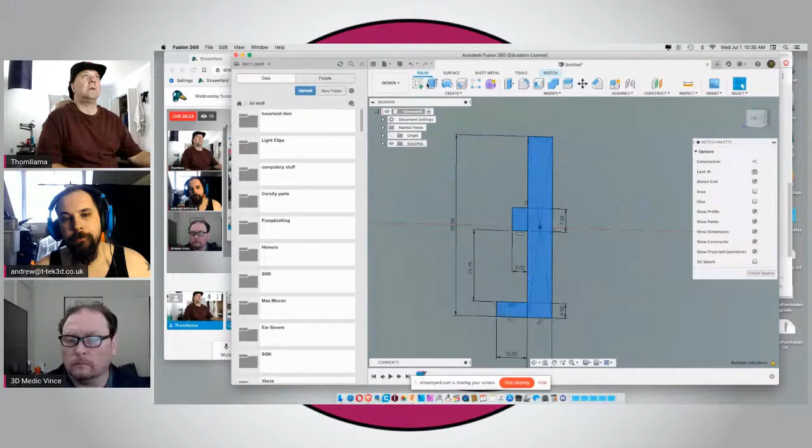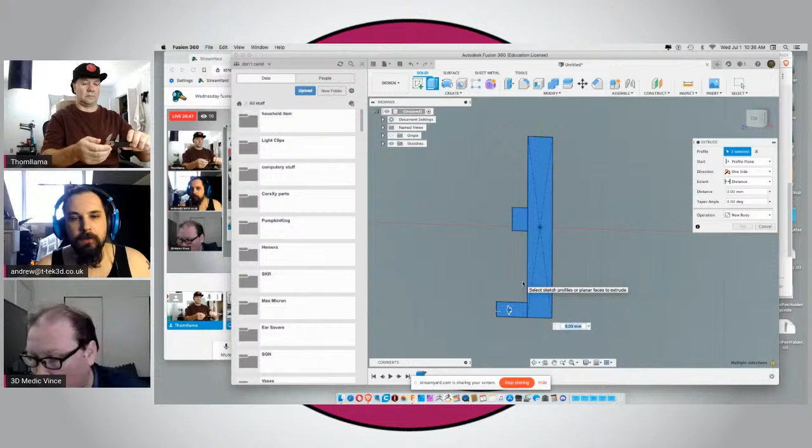I need to go back. Let's do it. I'm designing a new prop for Tanner's rubber band engine, because I found the other prop works, but it doesn't have enough push to it. So, 20? Is 20 enough? Might go 25, even 30. I might go 30, make sure it's beefy enough. 30.

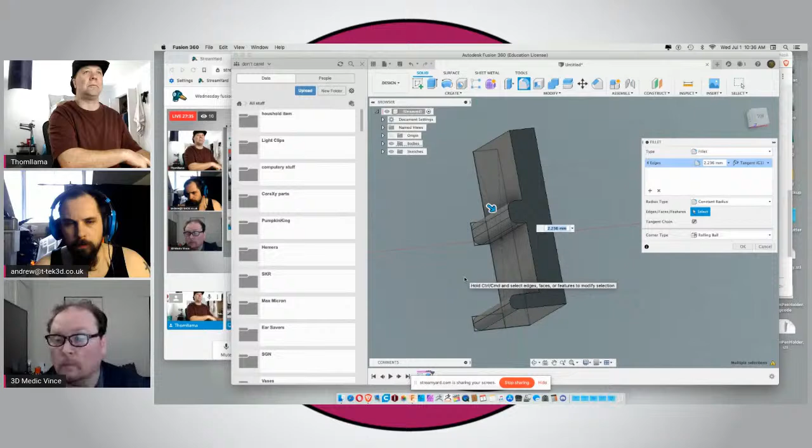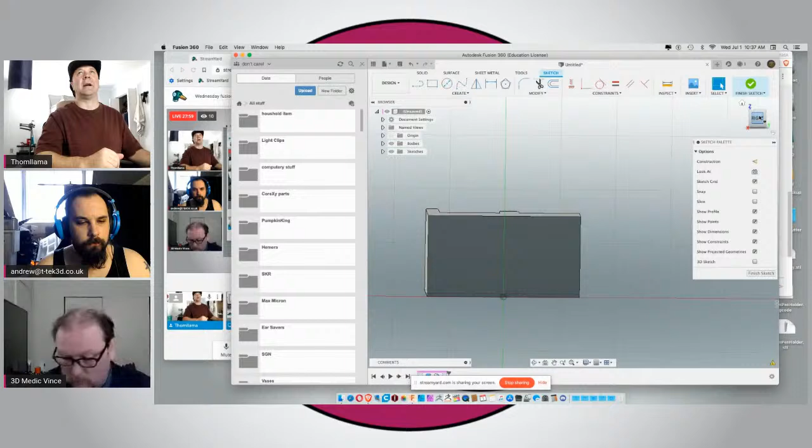Okay. And then the actual brackety thing here, which I hate it when it does that. Why did you rotate like that when I had you all rotated where I wanted you? I hate when it does that. It's so annoying, like it just does it for no apparent reason.

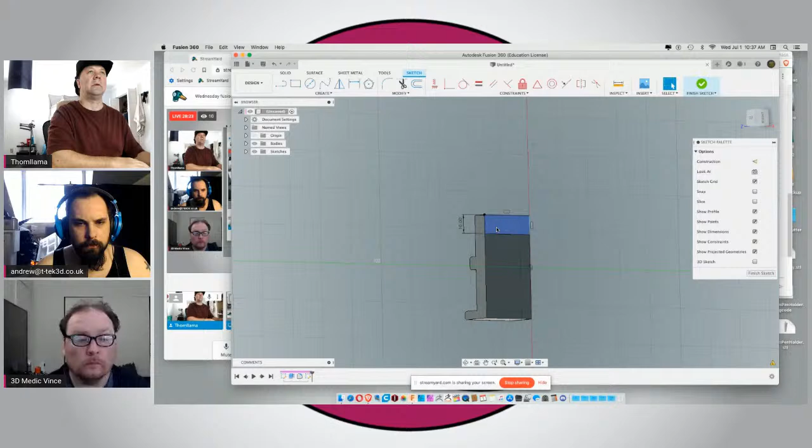And the tab, let's go 10 there and make it kind of big and blocky, even though it doesn't really need to be. Let's extrude that out. There's an easier way I could have done this, I could have done it with the rest of it. Let's come out like 10 or 12. 12 sounds good.

And then let's put a hole in it for a screw, and it's going to be capped. I wish you could set these defaults, I've yet to figure out how, because I use the same ones all the time. So I wish it would let me just default them, but I have yet to figure out how. I'm pretty sure there is a way.

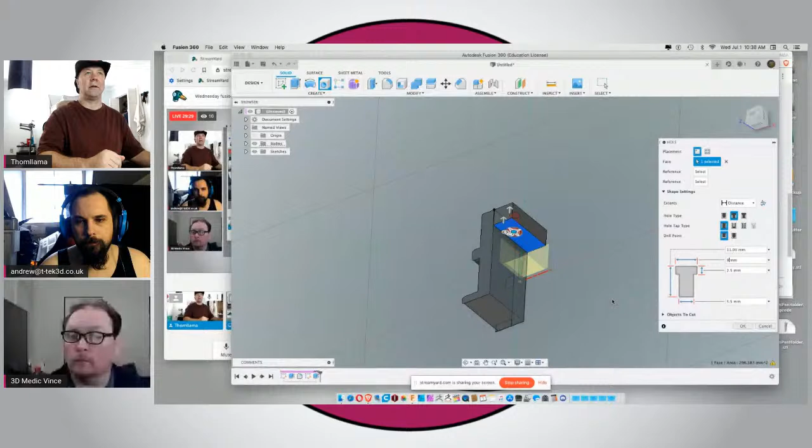2.5. And I want this at 5.5 because that's what most basic everyday screws are, and the head is usually around 9. What the hell is it? I want, what did I do? 30. So I want 15 off of that.

I think that was 12, so it needs to be 6 off of that. That locks it in place. And then when I print this thing, the hole will stay there.

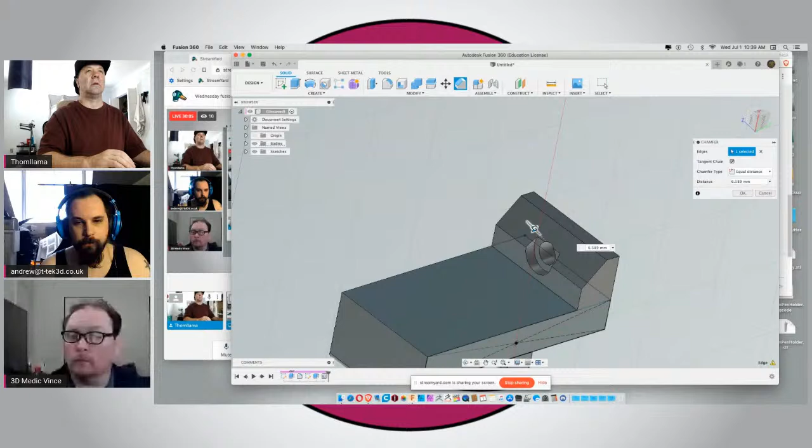Yeah, I made a small stack of those ear savers to take to therapy to give to the workers there. They seemed appreciative about it.

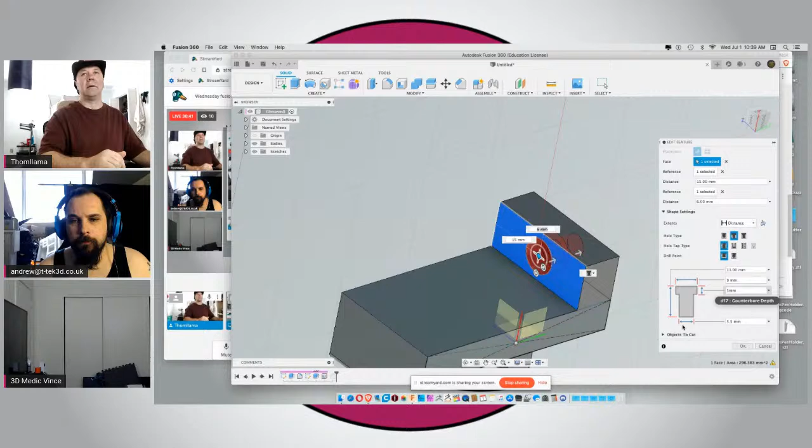2 distances. Bring that into there. I guess I got to do my recess even deeper because I want that to be proper like. So go back to here, edit feature, I want this right here to be deeper. Let's see, that whole thing is 10 or 15 deep or something, so if I do like 5, that will give me plenty. That'll basically work, that'll work.

Not what I wanted, cancel. I want to edit this. Edit, I want this to go all the way down. I think I did 12, right? So 12 should work.

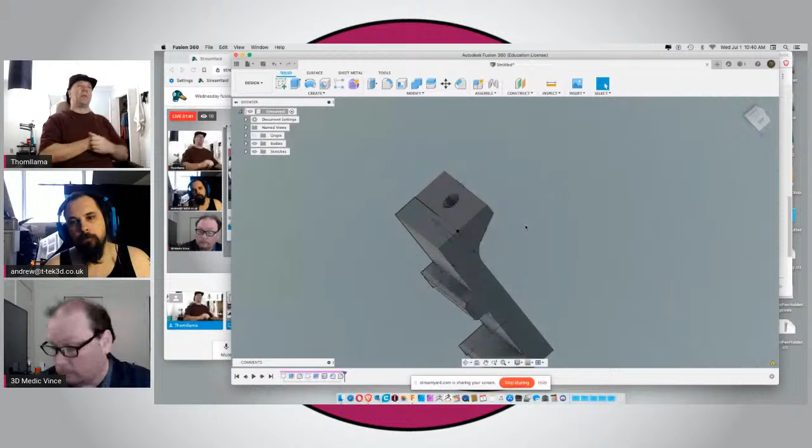And then I can actually round it to make it ultra cool. Bring back around that way, so it's a much stronger joint. Right? I'm not hating it. So if I just go with that, I need 4 of them. But actually I only need 2, because 2 more of them I have to put the stop on the back of.

So it can't just slide right off the back of the thing.

And this hair towel just won't stay up there, so I'm not going to bother with it. Don't really need it anyways.

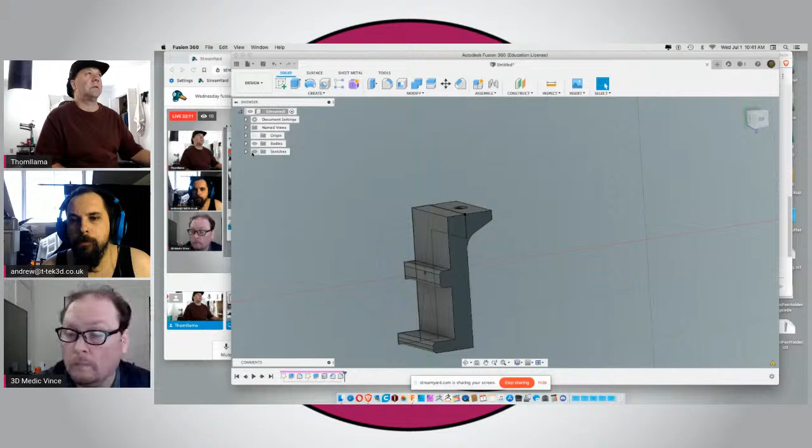Right. No way. I think I'm okay with that, that should work just peachy.

I cannot see a problem with it. Let's get that little round over, even if it's a little one. Let's do like 4 - 4 sounds good, that's a good number.

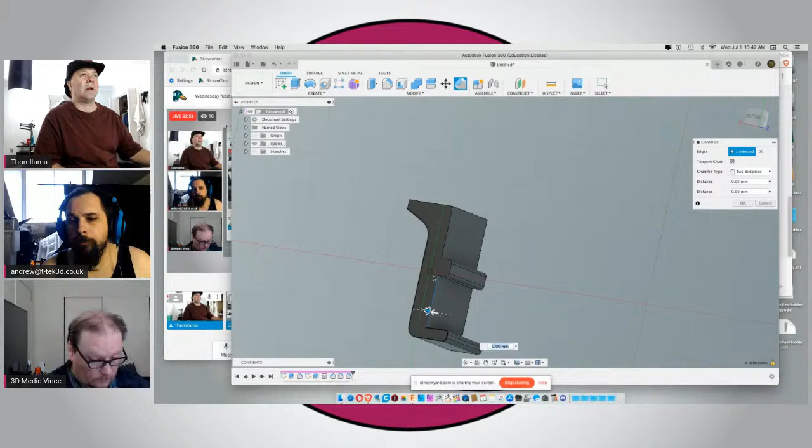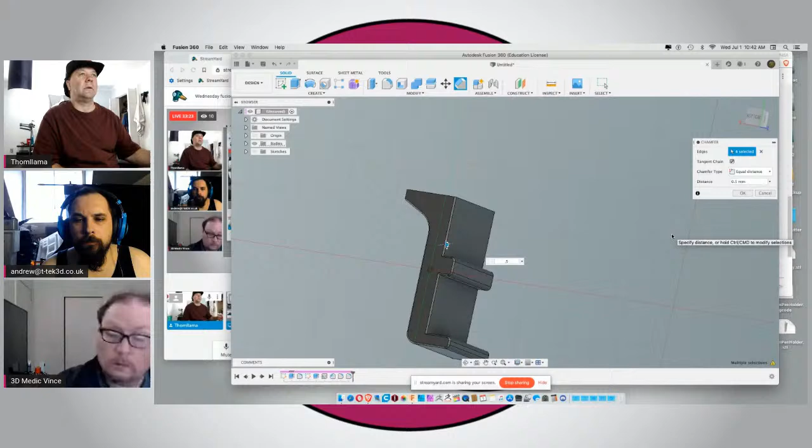Actually, I think I want to chamfer just a little bit - that edge, that edge, that edge, and that edge. Do it equidistant. Will it even let me? I don't want to do the whole thing, I just want to do those front edges. Gosh darn it. 0.5 - no, if it does the whole thing, who cares?

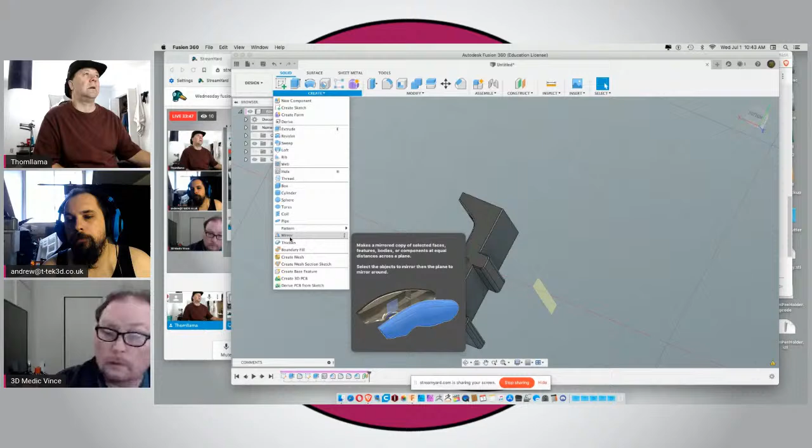Okay, and then a mirror. There's the two front ones. Let's change those. There's two back ones. Actually, all I need is one of them. I'm going to have to mirror after I modify it a little bit.

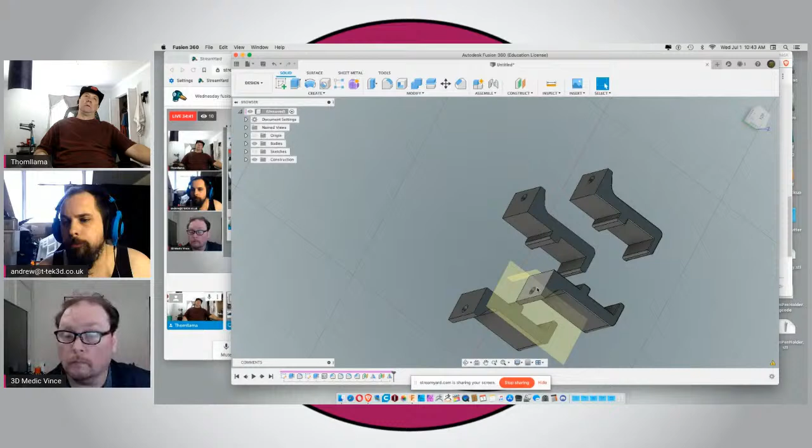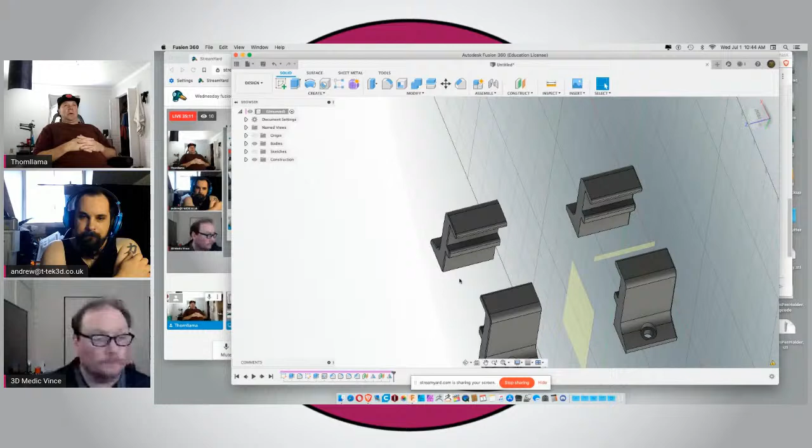Thinking on whether I should attach them or not - if I should just have two sides or if I should have 4 pieces, if that makes sense. 2 sides are going to be a long ass print, but I think it'd be stronger. Well, the underprinter control box I'm printing just now is 10 hours. Yeah, I'm not too worried about the time. I know I can do it, especially on the big ass 0.8 nozzle, I can spit it right out.

And I'm not worried about it being all pretty or anything. It's underneath the cabinet - you never really see but the very front edge of it.

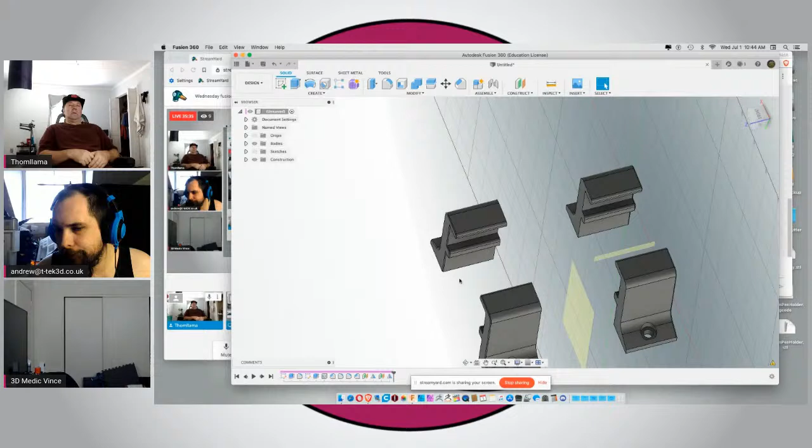Okay, stop thinking. What happened? I went too far - that's what happened. Redo. Redo, come on, stop thinking about it and just do it. Redo. Oh, I hate this whole thinking about it thing. Alrighty then, well, those are my 2 front ones.

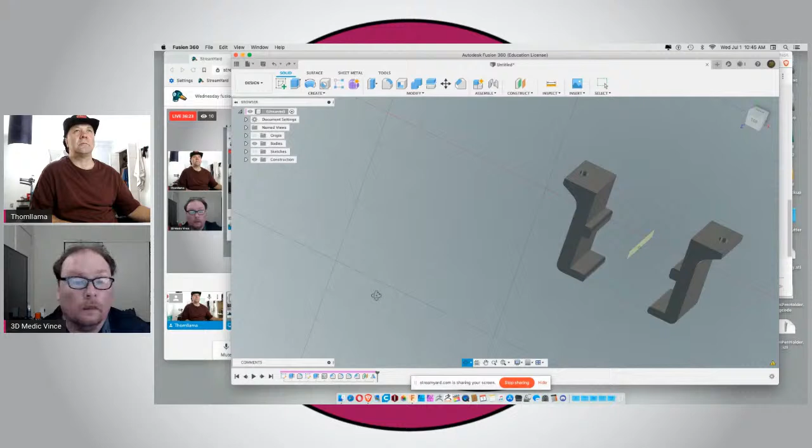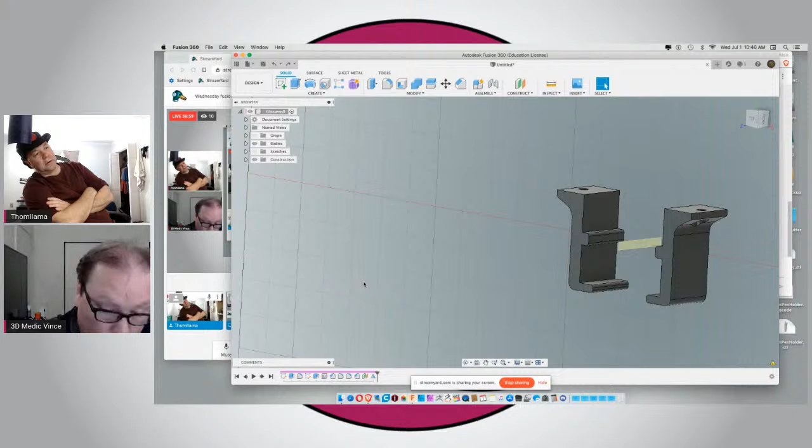Now I need to put a stop on it for the back, but it's got a weird pitch, like a pretty heavy one. So I think what I need to do for the rear is find out how much that pitch is, which I can guesstimate pretty closely - doesn't need to be exact.

And then should I attach it as all one, or should I have 4 separate little legs? The all-one will be much easier to mount, but much longer of a print and much harder of a print - they just can't lay it flat, you'd have to stand it up. So I think I'm going with 4 little individual clips.

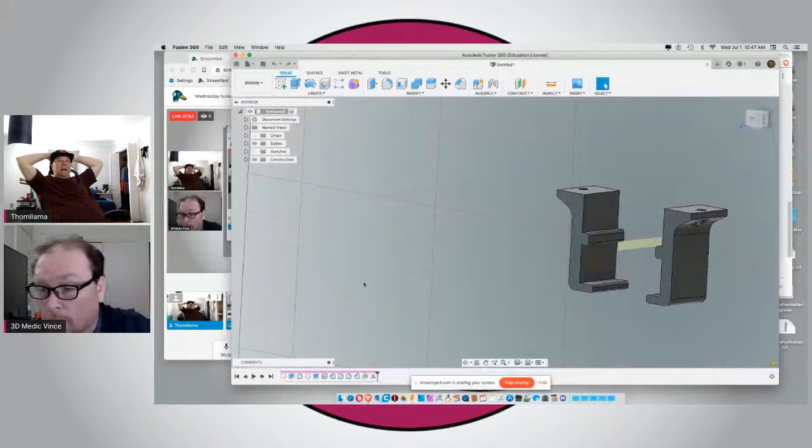So on that note, take this one. Let's see. Even though that's the bottom, I don't care, so this is the left. Right, save.

And that's that - what's going on in chat? I've been paying attention to chat, you didn't miss anything, Mr. Buttram. What would there be to miss? Yeah, I mean, it's just me and Vince. Oh, not even Vince - what happened to Vince? We lost a Vince and an Andrew.

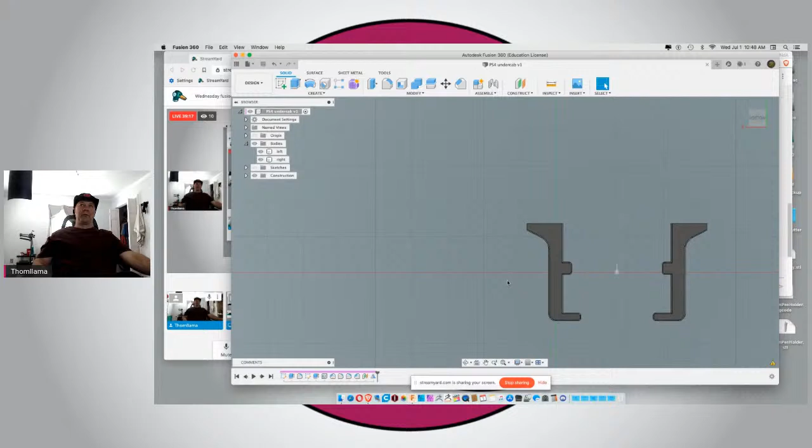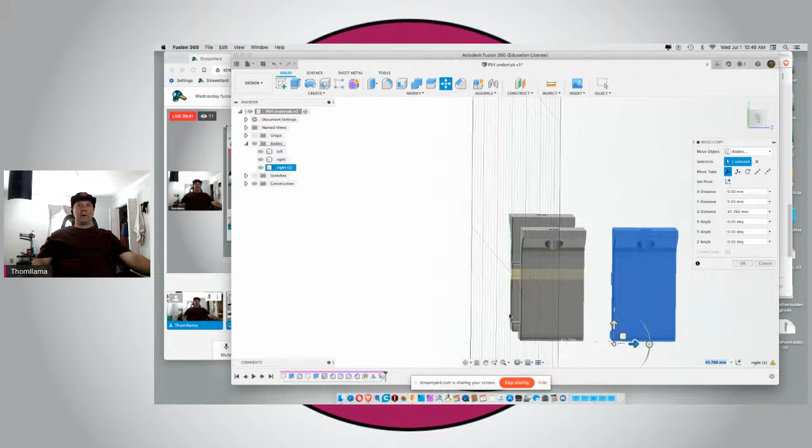So maybe head off a bunch. Right, rear.

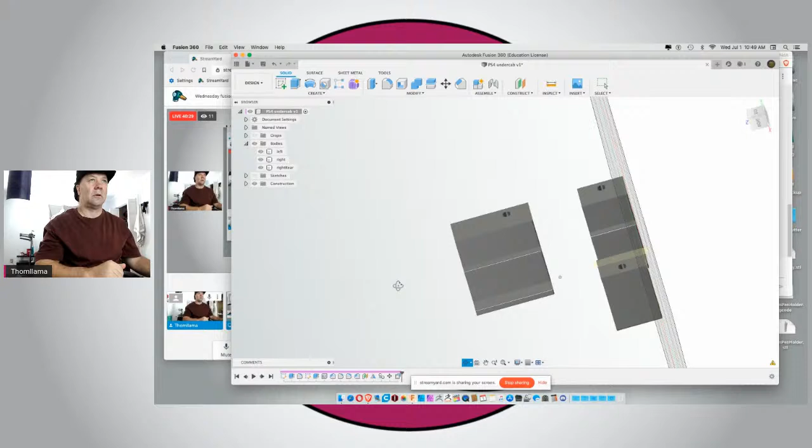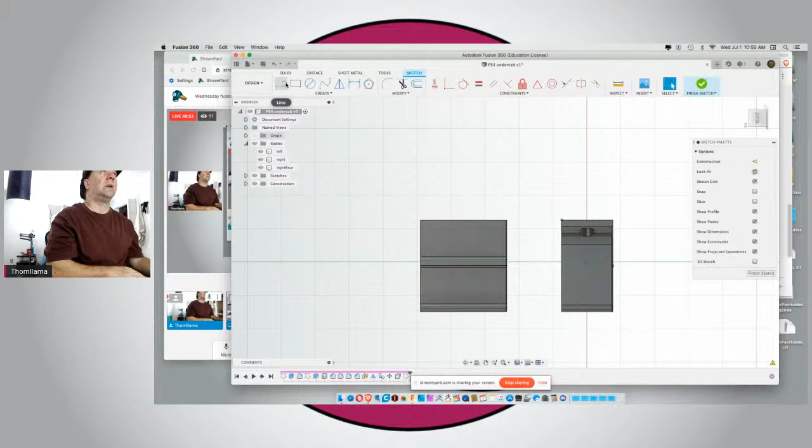So let's go from - we can actually do it right on here, on this plane. We'll put a sketch on there, and of course it flips around and does all kinds of weird crap on me I don't want it to do. And project all of this, and all of this, all of that, all of that. Now the whole thing's projected right to the very front edge, which I don't care about because I'm not going to be using that much of it.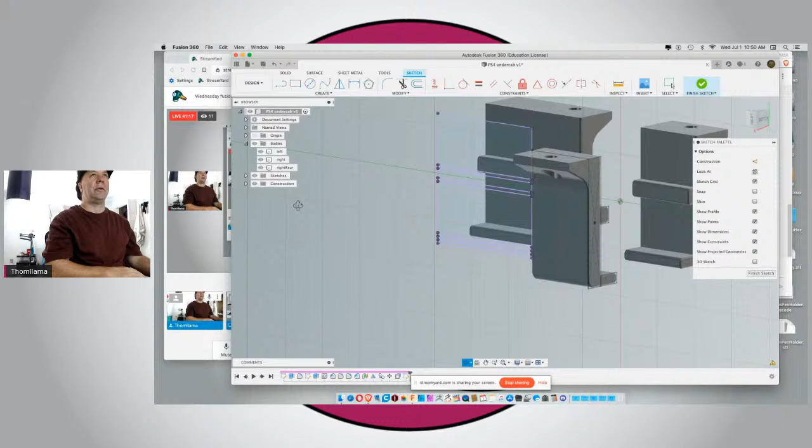And then I just need to draw one line from here to the middle - no, we're around here. And dimension this to that should be 30.

Okay, and I'm back - he's back. So if I take this, this, this, this, this, this, this, hopefully I got it all.

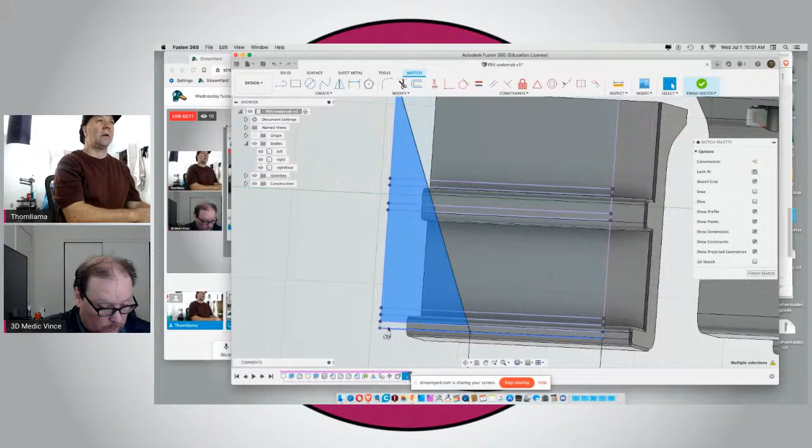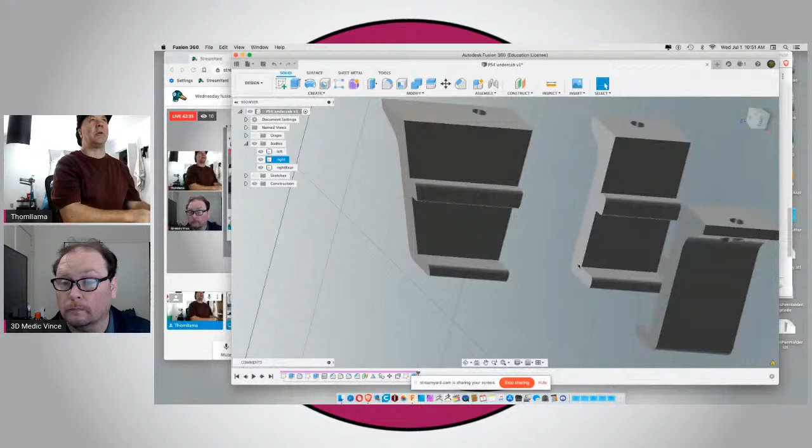And then I hack all of this out. Come on. Go that way and just tell it distance all. I should have a halfway decent pitch there - and I do.

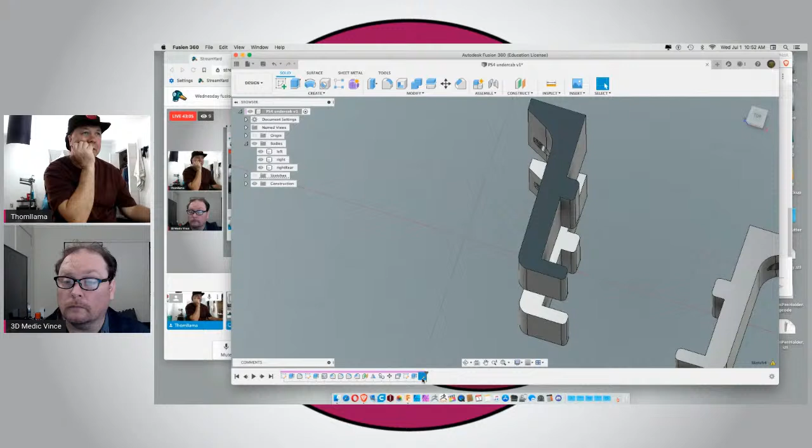And then if I take that and put a thingy there, which isn't really going to do what I want. What do I need it to do? I need to delete that sketch. That's useless. Go back to the sketch.

Edit. And then parallel off one of these, equal parallel. Oh, right here, that's what I want. Offset, and do like 3.

So nice stop. I'm glad - I think they rebooted the modem, and I think I'm happy because my speed just shot up.

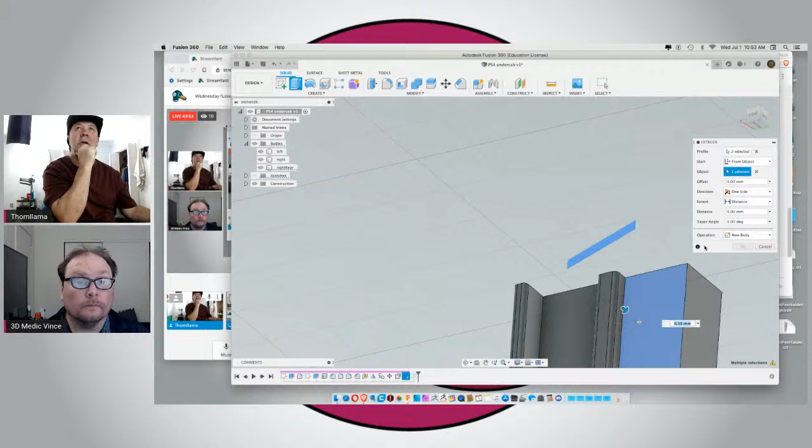Do that. And go to solid and extrude. From object, go from there. Go this way, just like 3 again is fine. Oops, -3. Actually, let's bring it all the way out to here.

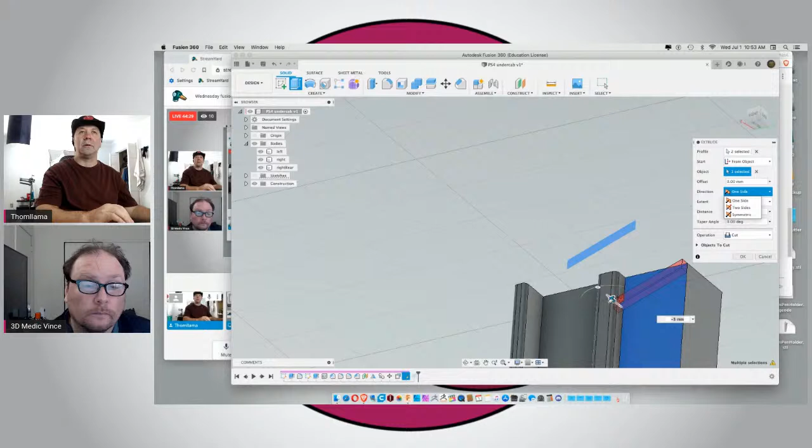Whoa, what happened? Oh, it's still on select object. Distance. Why is it doing that? I selected the object already. Now I'm at distance. Why is it still selecting the object? That's kind of annoying. I used to be able to just click there and it would go that distance. There we go, now it did it.

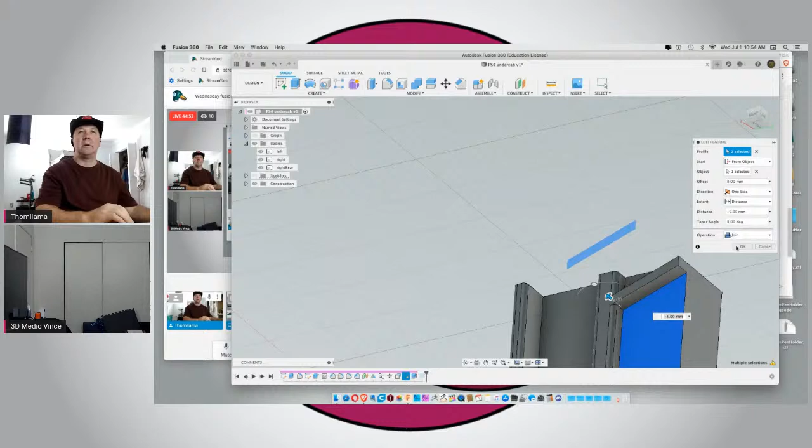Oh, I didn't want it to cut though, I want it to join. Okay, and that puts my little stop on the back, so the little PlayStation can't go too far backwards.

I'm okay with that. I could have centered this hole again and moved that all around, but you know what, I'm okay with it right there. So let's take and do a mirror.

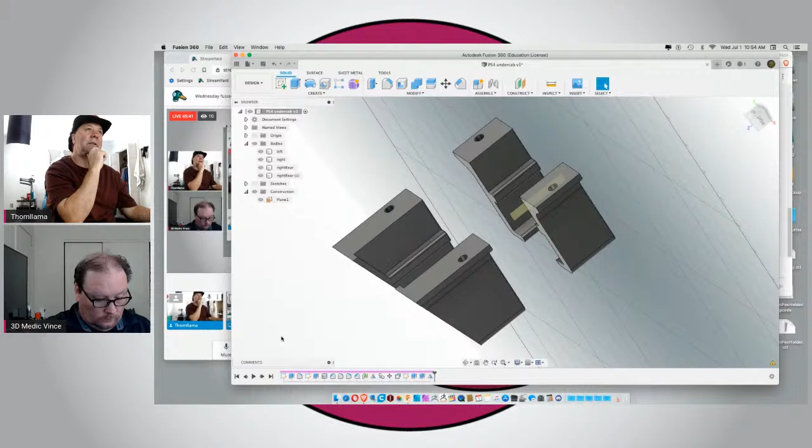And we will use this construction plane again. Select object, that one. Select mirror plane, that one. And now I have a left and a right, and a front and a back. Left, rear, save.

I need those 4 parts, and that should hold my little PlayStation up. Give it plenty of breathing room and everything too. It will be able to breathe.

Where are the actual legs? They're way in here, so they're not going to hit the legs. And that should snap into place, and that should work. There's no vents back in the back, are there? Here's in the front, none in the back. Nope, I don't think I got that angle quite steep enough.

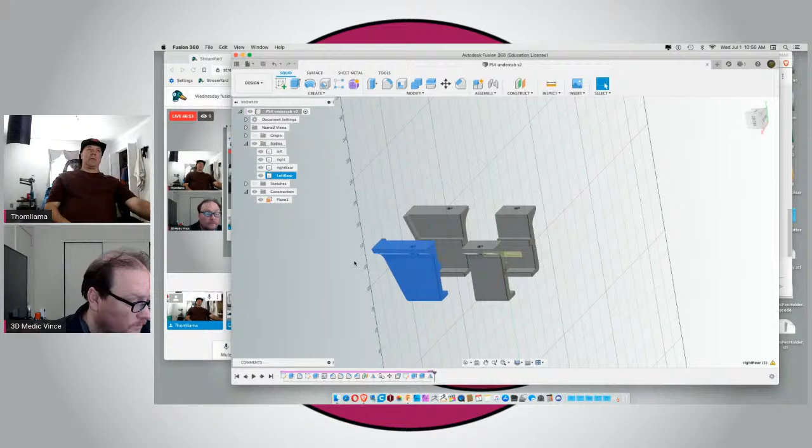And the nice thing is, once you get those designed, if it actually works out well, you could probably even - I was going to say, could probably even make, do something where somebody could buy some. I have a hard time selling crap.

Then people always want you to do stuff for them. If I just give it for free, I love these people. Like a lot of times, I won't rotate it so it's the best optimal printing, and then people say, you should have rotated it so I can print it. I have to rotate it now. It's like, wow, yeah, learn how to use your damn slicer.

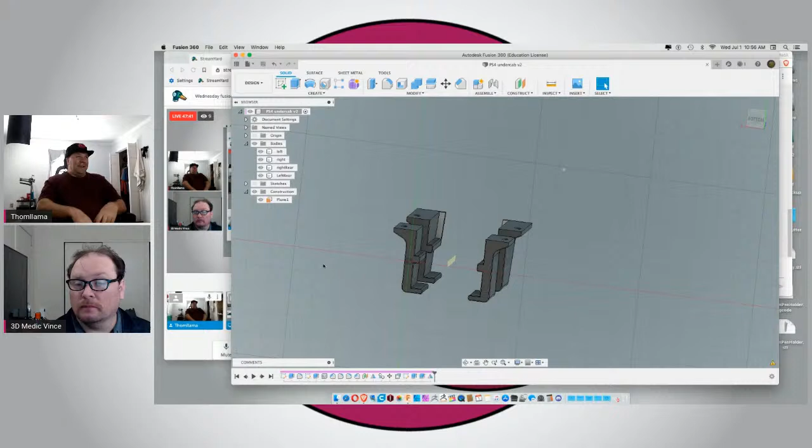Well, several slicers for sure allow you to do place surface on bed. So yeah, they all do. Yeah, so you can rotate in every slicer. Every slicer has a place surface on bed. It's like, stop your damn laziness. Sorry my free item isn't to your specification, you know what I mean? It's like, get over yourself. Just get over yourself.

And actually, I think I will too, because this one you can lay right on the bed here, and this one you can lay on the bed there, and it's all done, and you'll need no supports or anything. Even though this will print at an angle, it should still be - actually, that should make it stronger.

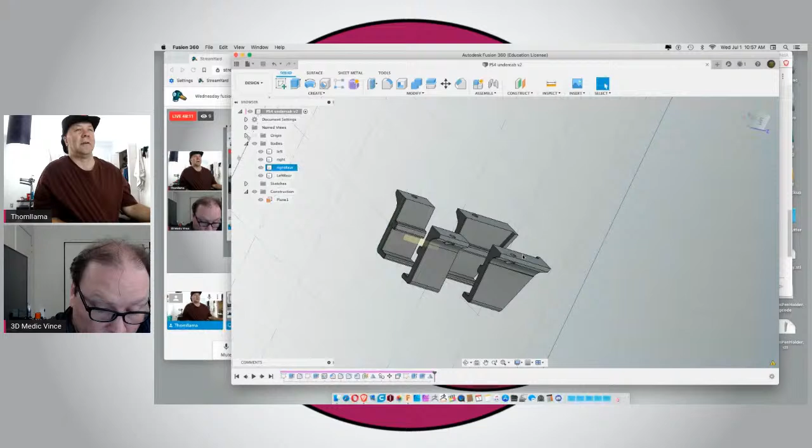Although the holes here, I almost wish I'd done the mirror before I put the hole in and moved the hole back a little bit. Well, do I want to? Does it matter? It really doesn't matter, other than it is going to be printing at an angle. Oh, let's see if I can

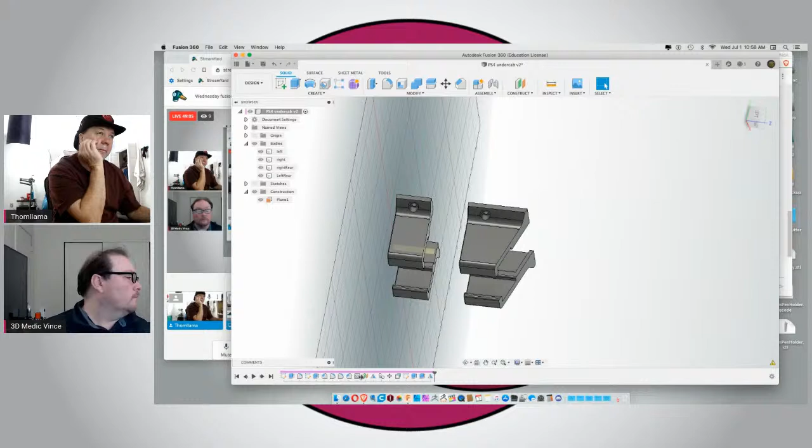Let's see if I can... all this stuff. Let's bring this over to here. And then this, can I move this before that? It won't let me, will it?

Yeah, I just love it when that first layer feels so smooth.

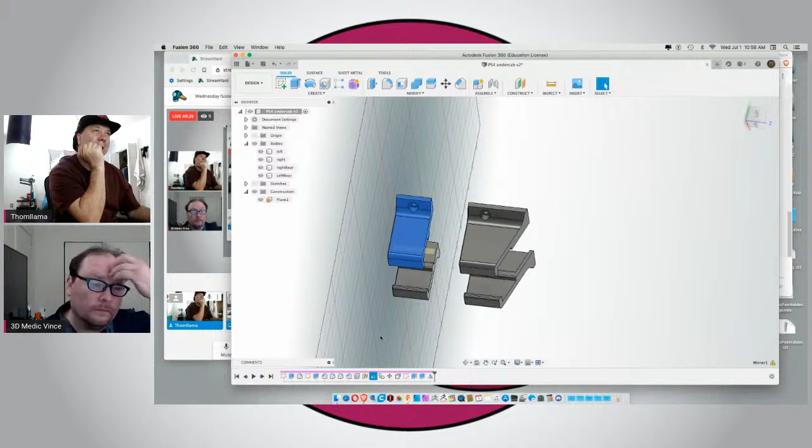That's the border where it won't let me move anything anymore. Well, I can get rid of the double mirror. If I get rid of this mirror, delete. I get rid of this mirror,

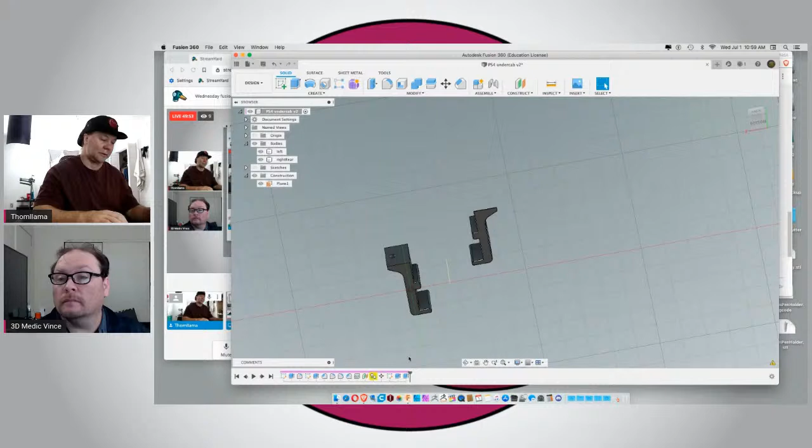Delete. What the hell happened? Oh, I know what happened. Command Z, Command Z. I duplicated the wrong one. Oh well, it's really not that important.

Ryan, in Simplify3D, the Place Surface on Bed is in the Edit menu, down towards the bottom. So it's called Place Surface on Bed. Control L.

What's that? Are you talking to someone on chat? Yeah, they all do. No, he was asking about Simplify3D. Yeah, they all have it. They all, if you left click or right click on it or whatever, you'll get the menu.

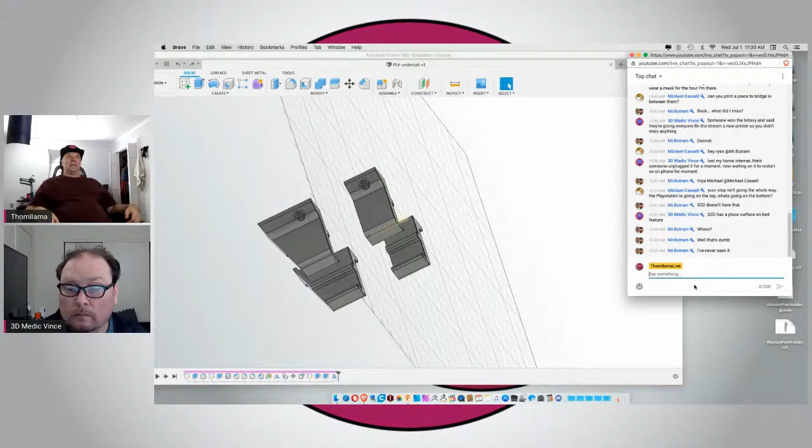S3D has it right in the move menu somewhere. Yeah, you have to right click on it, like all of them. I usually just go up to the Edit menu and just do Place Surface on Bed. Yeah, it's in the edit menu with the S3D, huh?

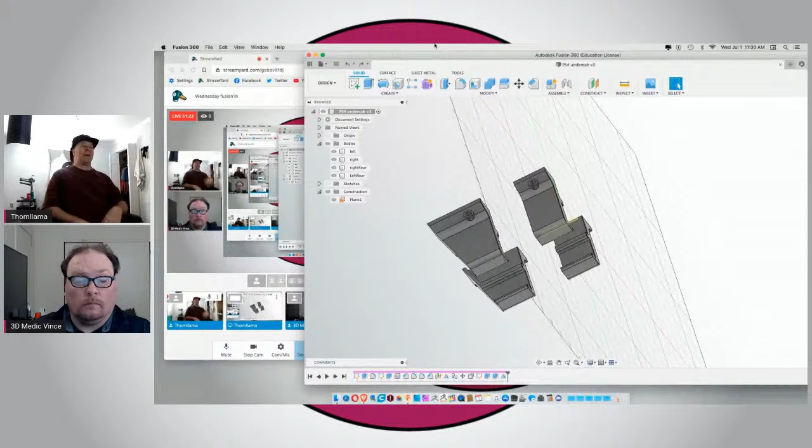I think if you go over on the right in the S3D, it's been so long since I used it, but you got all the control points. I think one of them over there's a button that says Place Surface on Bed, if I remember correctly. But every slicer, Prusa Slicer, Cura, IdeaMaker, S3D, freaking Kiss Slicer, they all have a right click on it. Click on a face and it'll rotate. You know, right click, you'll get a menu that says Place Surface on Bed. Like every slicer I've ever used has that. I can't think of one that doesn't.

Kiss Slicer has it, I know. IdeaMaker has it, I know. Cura has it, I know. Prusa Slicer has it, I know. S3D has it, I know. They all have it. You right click on it, and you get the menu, which I'll show you in a minute because I'm going to do it to these. But I don't think I'm going to print all of these at once. But I should turn the printer on and warm it up.

And llama core. Heating up the llama core.

All right, I sent you... so much slower... picture of where it's located. I was telling Butram that I took a picture of the menu and sent it to him on Twitter so you can see where it's located.

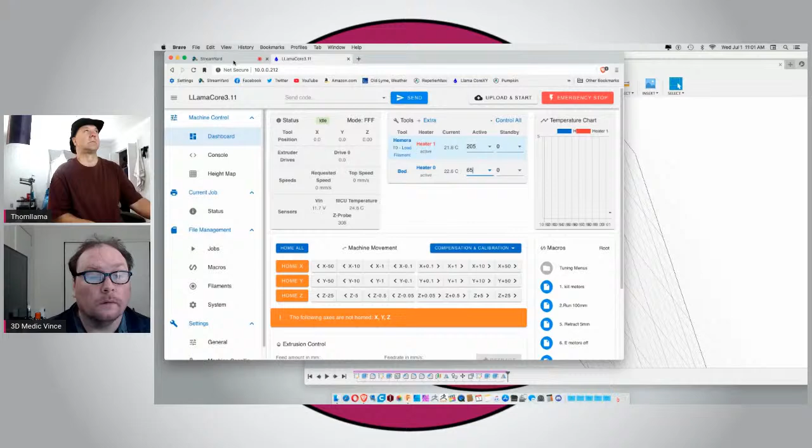Where am I? I need to export all of these. Save STL. And yes, I'm going to do each one individually instead of as a group because it's a hell of a lot easier on me.

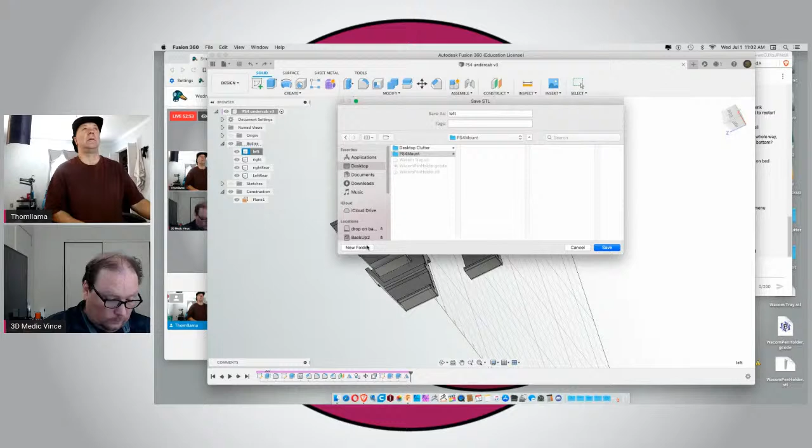I gotta find something to print. Something else, I should say.

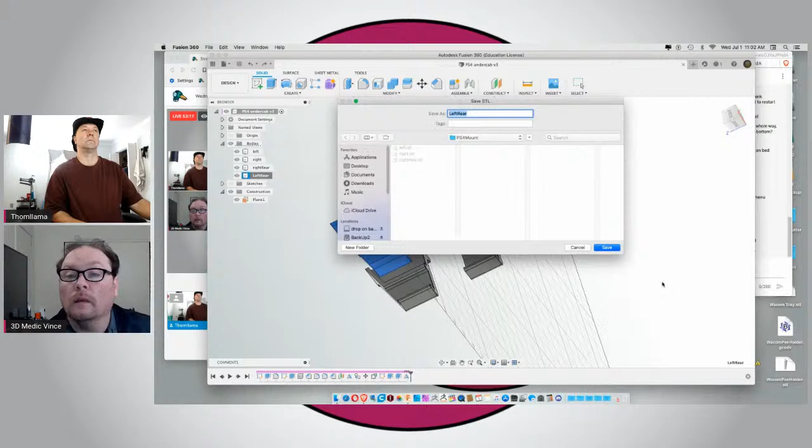And save and quit. Which now it's got to go into its little long off freaking... Wow, that was quick. The only thing I don't like about Fusion is that whole process.

No, it clips onto it. It's a PS4 Slim. So that notch, I'll show you in a second.

Let me get IdeaMaker. Actually, I should download the new IdeaMaker. The one that this is a beta of got released, I don't know, yesterday. The 3.something version. What do I have here? I don't know, the latest beta got released in the last day or two.

And let's do the back. Actually, let's do the front ones first. Desktop, PS4. Let's do this one and this one first, just because I wanted to test them. And they're actually already placed, or are they? I think I want to flip them over. I do, because I got the other side chamfer. See, here's with IdeaMaker.

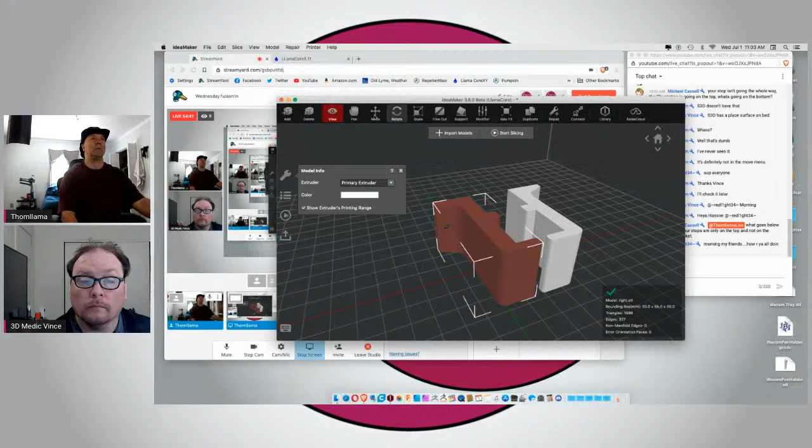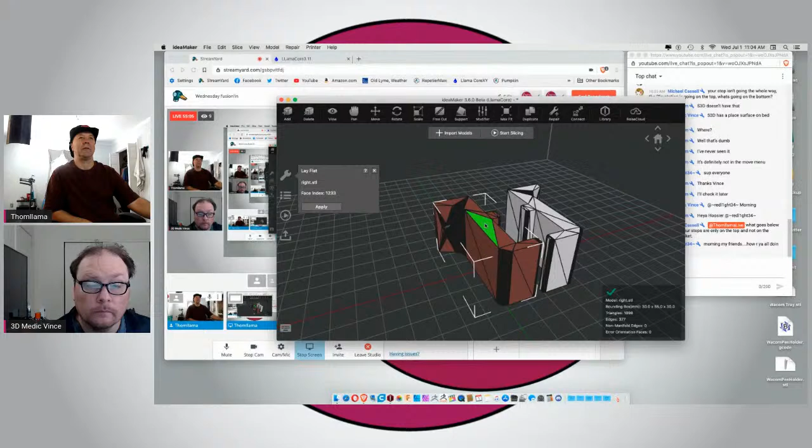You left click, because I'm left-handed so I have all my buttons backwards, but it's basically right click. And then it's, where the hell is it? Right here somewhere. Where the hell is it? Auto fit to build volume. Lay flat. There it is. Apply. See? Lay flat, apply.

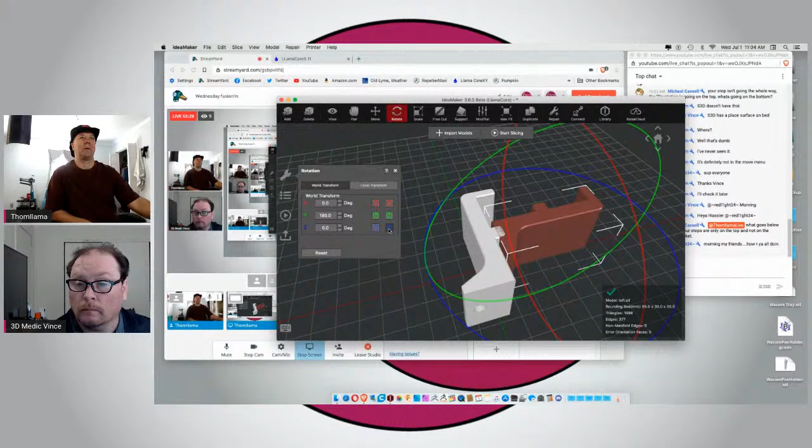It does do that weirdo frickin' 3D weird thing though, which I'm not sure about. But whoops, not what I wanted. I wanted to go this way, and then I want to go that way. And that should be all right.

Start slicing. I want the core base PLA.

What is up, Mr. Red Light? You in the crane, man? Come frickin' broadcast from the crane. We want to see the crane.

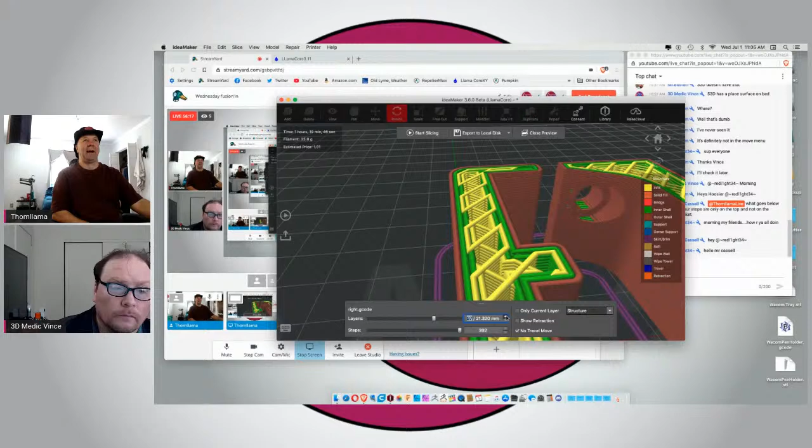See, if you notice this really cool effect, I've got 3 shells here and 2 shells there. And see how it interlocks as I go up or down a layer? That is one of the awesomest features of IdeaMaker. See how that locks in and goes back and forth? And then this layer goes on top of those and locks everything in, and you get a multiple wicked strong infill/shell building.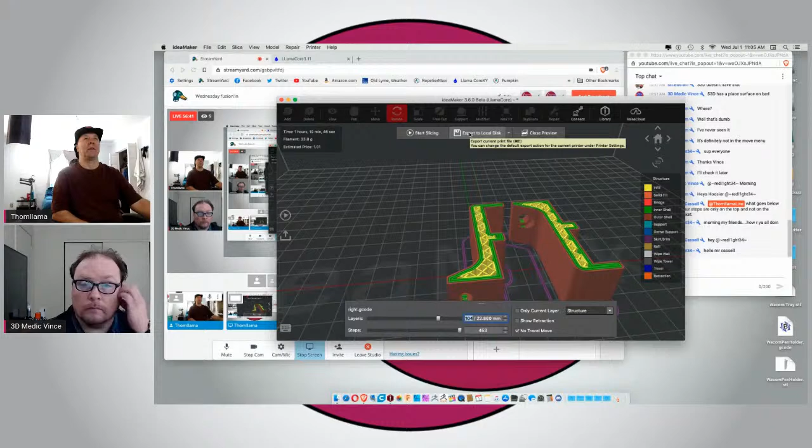I mean, it will take 1 hour and 15 minutes. Export to disk. Looks just fine to me. Did I flip them both? I think I did. Okay.

Get up to the top. Are they chamfered on top? Yes, they are. Are they both chamfered on top? Oops, wrong way with the mouse. Yep, they are. All right.

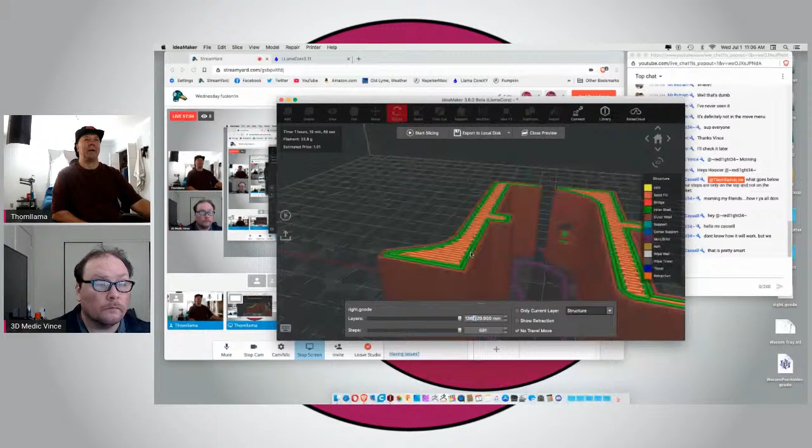The other thing I like to do is, people don't realize, see how these are all at 45 degrees? Normally your top and bottom infill matches this 45 degrees. The problem is when you do that, as you're bridging over this, you get funky stuff because they're all at the same angle. That's why if you look at my top and bottom, they're at 90 and 0 degrees. So you get a much better, stronger lock in there too.

Making for very, very, very strong parts. I already exported it to this, didn't I? Yep.

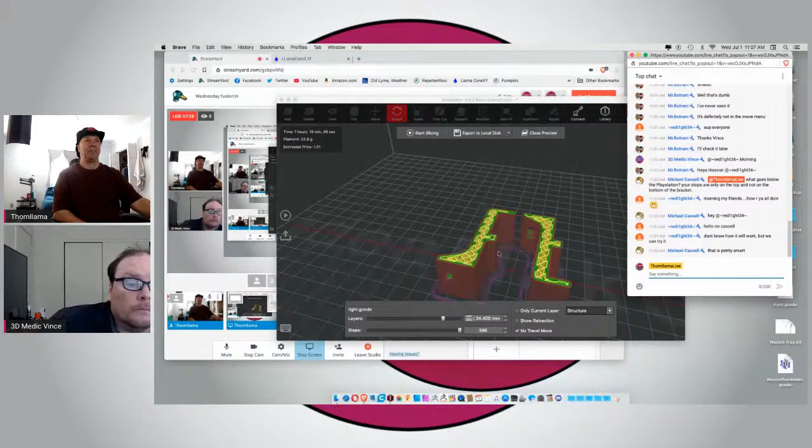So if you look at this, the way I got this, who was saying it wasn't gonna lock in there? This actually goes below the PlayStation. This is the bottom, and this locks into the little lip. And then this is all taller than the PlayStation. So the PlayStation's going to be about 5 to 10 millimeters off. The PlayStation's actually going to start right about here. It'll have space between the cabinet and the top of the PlayStation.

Then there's that rib on the PlayStation Slims, and then that's the bottom. And this is smaller than that rib is. It's like a millimeter thinner. So it should slide right in there and rest on this as the foot. It actually holds the PlayStation in place. That makes sense there, Michael?

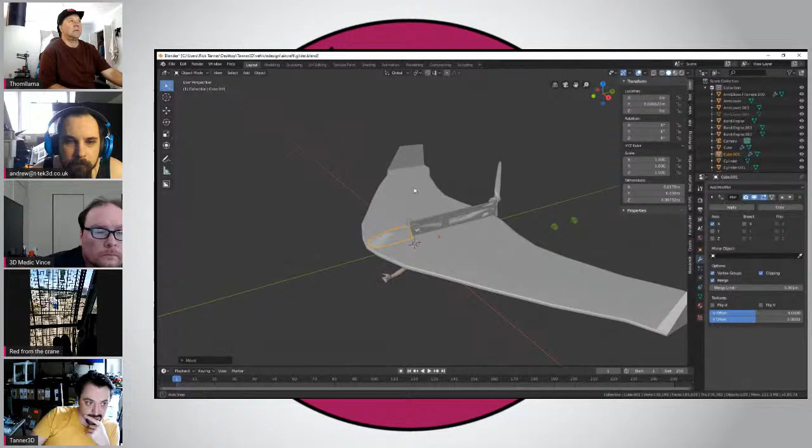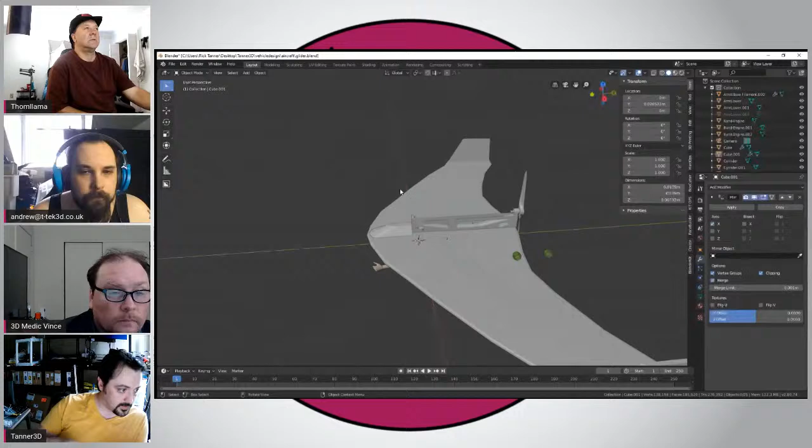So like I said, I have no idea if this will work or anything, but I thought if I keep them all separate pieces where you assemble it, if it doesn't work then I'll just make something fancy for back here, and it'll be non-functioning. It's pretty cool. Dude, you gotta start putting the other arm and leg on there. It freaking creeps me out.

It reminds me of the first time I made my first rocket engine. At McDonald's you used to get these Action Man toys with plastic winglets, and you could throw them and they would glide. I decided to hot glue a rocket motor I'd built to it, and it went off, got halfway, and then blew up. I had bits of it come flying at me.

Yeah, so I used to make rocket motors as well. Oh god, we used to glue rocket motors to jarts, remember jarts, long jarts? You'd glue a couple 3 Estes rocket engines to those and launch it up in the air, then run and hide, because when they come down, I've still got some 5Cs. They do some damage. If you know what the 5Cs are, they're like that big and can go up to 1,000 feet. Yeah, I've still got a couple of those.

The problem is we'd always use hot glue, so it would get halfway up, and then the hot glue would release because the engine gets hot, and the motors go all over the place while the jart's still going up in the air.

The coolest thing I ever made was with those big water jugs you get for the machine, like the water drink things. I turned one of those into a pulse jet, and it worked for about 10 seconds until the top just blew off. But it worked, it was so loud, just brilliant. For the couple of seconds it was going, it was loud, until the top just went woof. I was just loving it.

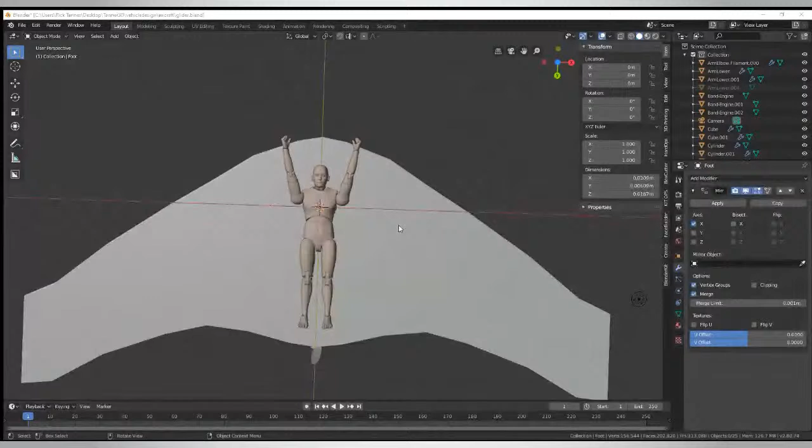Why won't it let me put it on there? There it goes. Yeah, full body parts. Dude, it gets creepy looking at that figure with an arm and a leg missing. It's almost like you've got a tripod flying around.

So how long was the wingspan on that at the end? It's just under 400 millimeters. 400. How are you gonna print that? It is, let me see. I measured it, you're gonna have to split it up.

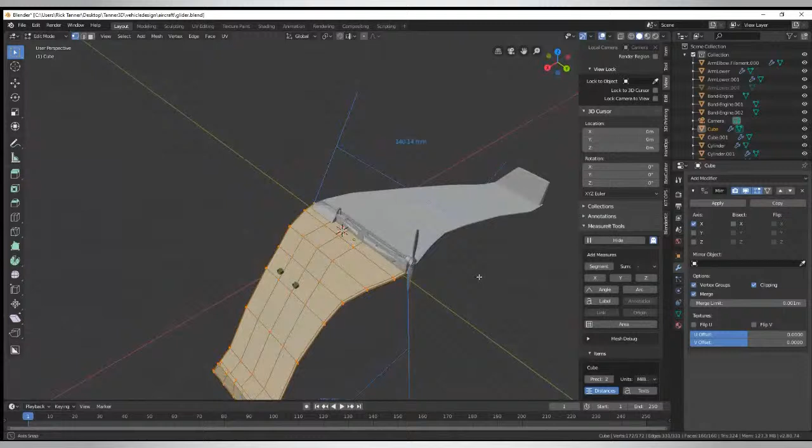Why is my measurement gone? 1, 3, 3. Let's check the props. Oh, there it is. So are you gonna 3D print the prop, or get like a regular quadcopter or airplane prop? Half width is 195, so 390. And then the main body part is 140.14 long.

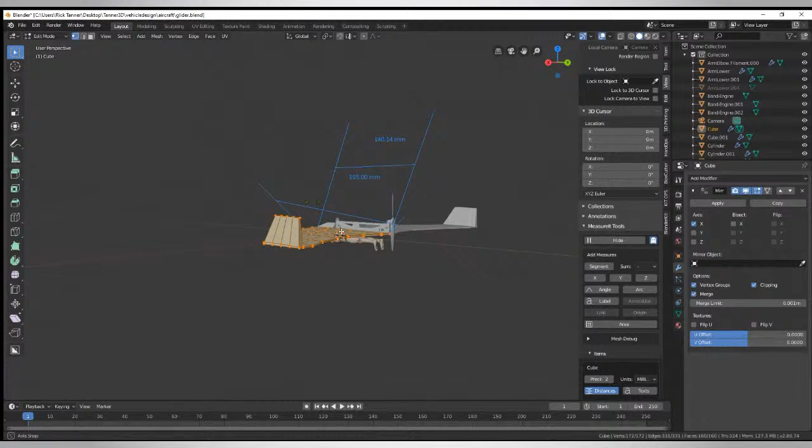Now the wings sweep back. Put that on right now and try it, see if it'll fly. Well, after this print is done, I'm going to add a little aileron on the back, rig up rubber band engines, and do a push test on it to see how much torque it's got. Because the first prop, when I tested it, it didn't look right, so I'll just get a lighter and smooth it off.

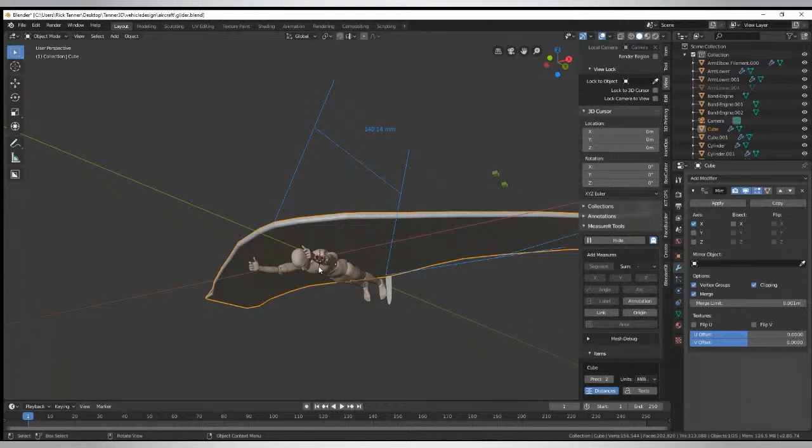So yeah, the only things I have left to design are how the figure is going to connect to the bottom — two posts that you just click in, and then a magnet.

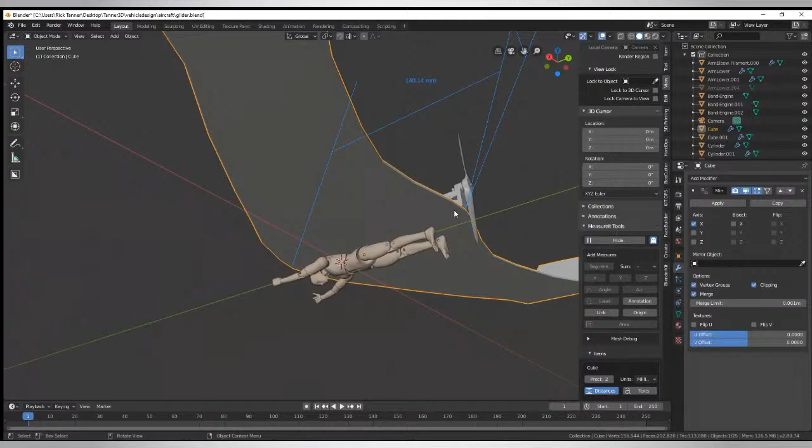Just find your CG, because you'll need that. So if you hold it on either side and move it forwards and backwards, see when it starts to tip down, put a dab of hot glue where the guy's going to go, put him on, and adjust your CG to there, and then you can tell where your mounting point's going to be. Because if your CG's off, the minute the torque comes from the rubber band, it'll just tip and stall, or go straight down. That's why I was thinking about having like a channel, a slide you can adjust, and then have the thing he connects to have the ability to slot in a little further forward or back, and maybe put some pinholes in the side to stick a pin in when you find the right spot.

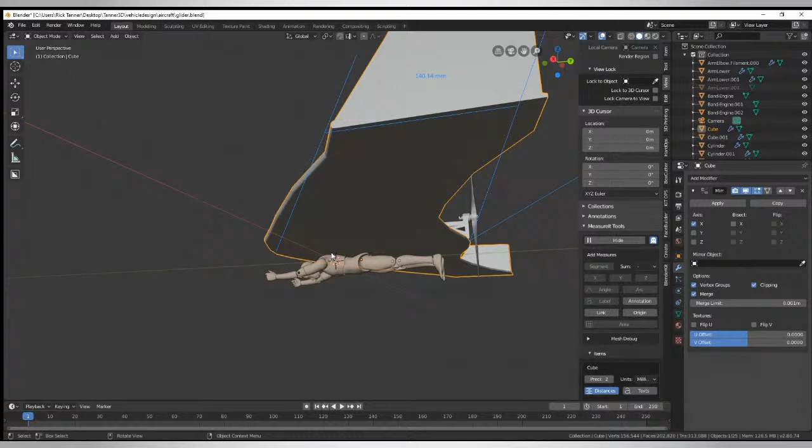On that note, I gotta go figure out what I'm making for lunch for Mom and Nutcase, so I'm gonna have to kill it in a few minutes. It's only quarter of. But gotta do it soon.

Oh, so did I see right last night? StreamYard lets more than 6 people in now. Yeah. Wow, up to 10. Yeah, for the longest time that was their biggest drawback, you were limited to 6 people. So like when Mr. Butcher would do the stream, I think you'll find by the end of the month it'll be even more. Yeah, because when Mr. Butcher would host the Saturday Night Makers stream, it was hard to ever get in because there was always 6 people max. And it's paid only — the free version is still limited to 6.

Well, then we need to get some people to send some Patreon money or something Mr. Butcher's way, so the Saturday Night Makers stream can have more than 6 people. Yeah, he's rich, he can afford it. He has kids — when you have kids, you can't afford anything. He can afford it. You can just start affording all that with that lovely aluminium anodized extrusion, so I think he can afford it, I guess. If he can afford a freaking Slice Engineering hot end, he can afford StreamYard. Yep.